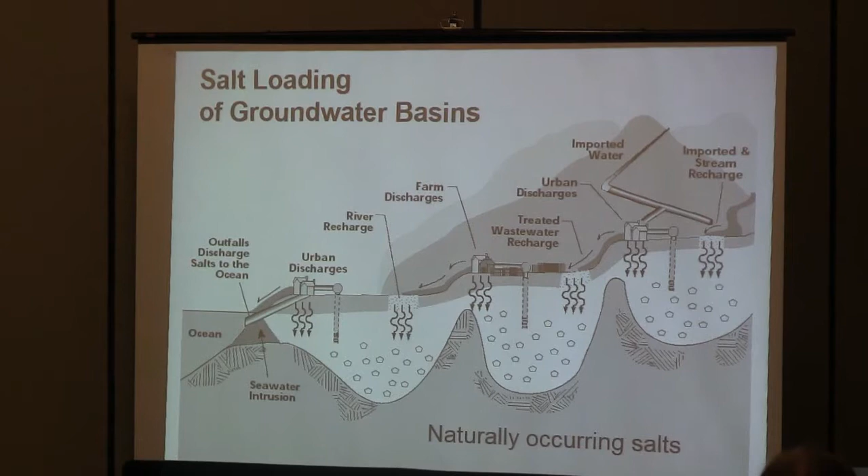We have an extra special case here because we have a lot of marine sediments in our county, so there's some naturally occurring salt at a little higher level than some other areas. So although our state water project water that we get in is relatively low in salt, as it gets reused and as we keep irrigating over time, the salts are building up in our area.

So just a lesson from history. Babylon didn't fall as a result of low water use or all kinds of other things that make civilizations fall. It fell because of salt.

The Fertile Crescent, which includes Iraq, and you've seen that on television, it's not exactly an agricultural heaven. That whole area, Egypt over Mesopotamia, used to be a great agricultural region, and civilization thrived, and everything was great, and we irrigated, and eventually everything salted up.

And it's salted to this day. That's a lesson that we want to learn from, and not have somebody talking about the fall of Ventura County someday because of salts. And they won't, because we've got solutions to the process.

So the problems in our area in general with salts, as I think most of you know, those are the basins. The red ones are the ones with the most salt, orange a little bit less, yellow a little bit less, but they're all higher than would be best for agriculture, at least many of the agricultural purposes. So right now, some groundwater and recycled water in our area isn't suitable for irrigation.

The salinity is too high. There may be a few crops that can be grown, but berries and avocados and citrus have different salinity tolerances.

Dischargers, the wastewater plants in our area, especially when they're using groundwater as some of the source that goes into people's homes and then ends up in the wastewater, they're violating regulatory limits as they discharge into creeks. That's a problem. And then some local groundwater supplies aren't being used due to salts.

There's quite a bit of groundwater in Simi Valley, Thousand Oaks. There's some in Camarillo, Moorpark. They're all too salty to be used, and in Thousand Oaks and Simi, they're actually nuisance water and have to be pumped out because they would flood homes and vaults and things like that.

So we definitely have salinity problems in our area today. Another thing is, everybody's looking at stormwater recharge as a new water source. Well, if your groundwater basins are full, stormwater can't go into the basins. They're already full with salty water.

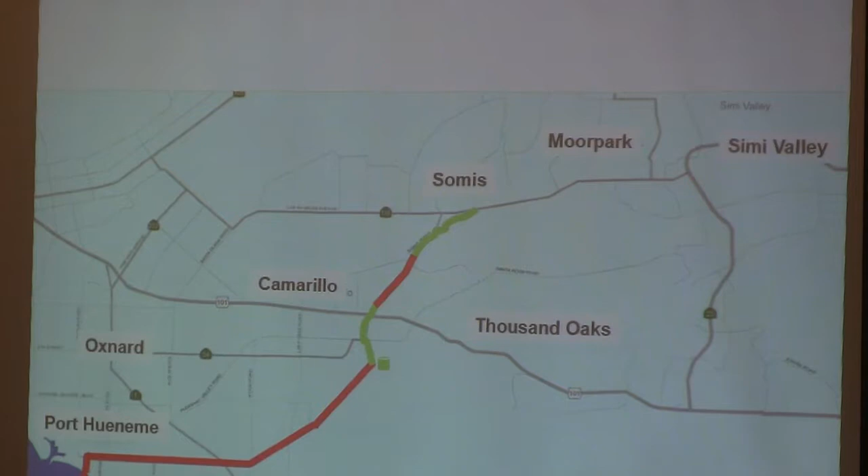And then there's some future reaches. One news update is that last fall, our board made the decision - we had originally planned to go straight from Moorpark to Simi Valley with the pipe, but there are some salinity issues in the Santa Rosa Basin and also in the Conejo Valley area.

And if the pipe comes up Santa Rosa Valley to get to Simi Valley, that opens up a lot of options for the folks in the Santa Rosa Valley and for the folks in Conejo Valley. So that decision has been made, and that's the proposed alignment. Generally, we haven't defined it.

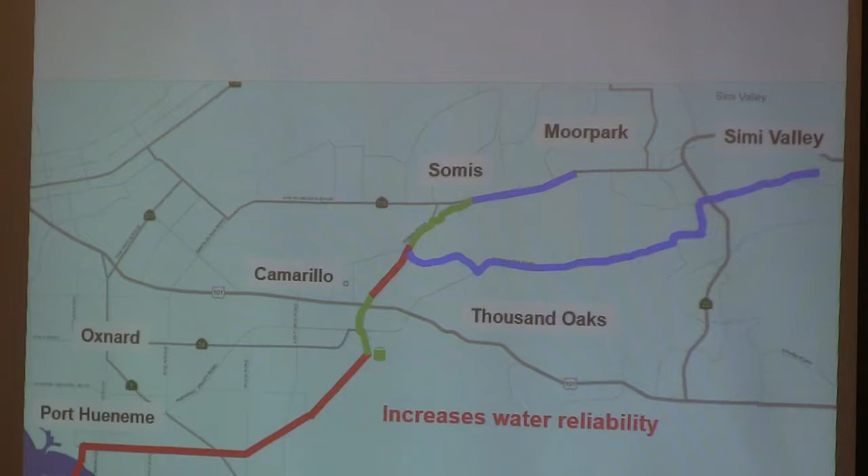So what the pipe does is it increases water reliability, because we're developing local resources. As you all know, the State Water Project has its problems with reliability. And it increases reliability by letting the brackish groundwater be used rather than just sitting there unused or as a nuisance.

So what's being discharged to the salinity management pipeline? It's brine from treatment of groundwater, these brackish desalters, and it's also tertiary treated wastewater. Nobody's actually discharged the tertiary treated wastewater yet, but we have a connection to Camrosa's plant. And the reason is they are doing everything they can to use recycled water whenever they can.

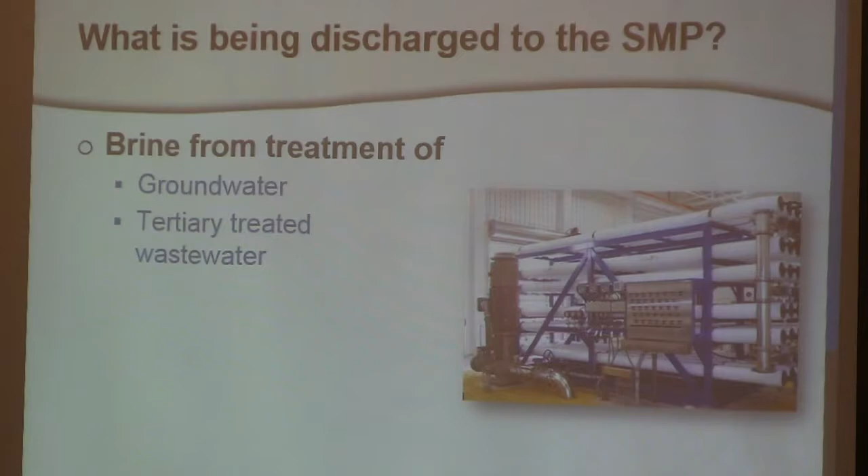So in the spring, summer, fall, there are lots of people who need the recycled water, but when it's raining, they don't have people who need the water.

And if it's a particularly wet year, which hasn't happened lately, they might have too much excess water, and that wastewater is too salty to discharge to the creeks. So they need a place to put it, and they would put that into the salinity management pipeline.

Sorry, the first one was about brine from tertiary treated wastewater. That too we don't have yet, but there are some opportunities, especially as people start looking at potable reuse, direct or indirect, where they're treating their wastewater plant water with reverse osmosis, and that gives them a place to put the brine.

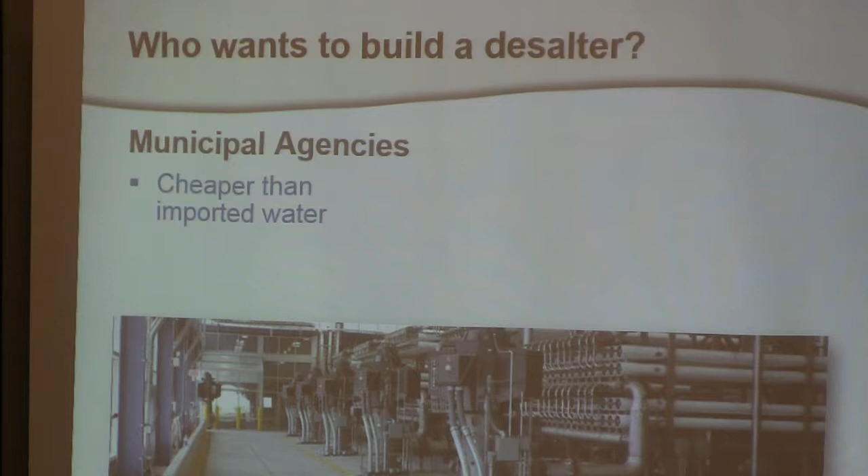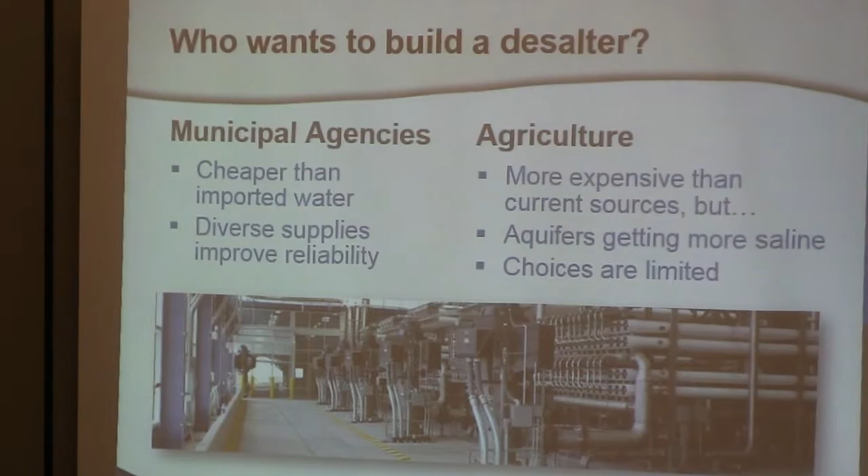Agriculture is also looking at building desalters. It's more expensive than their current sources, their groundwater. But as the aquifers get more saline, they end up with limited choices. And if their other choice is buying imported water, these desalters look pretty good. It's also less expensive for agriculture to treat, because they don't have to get to the same quality standards that the municipal folks need to.

And we'll get to some costs—Brian will get into some costs later. So I'm going to go through the facilities, and we have some flyover footage, so you can pretend you're at California Adventure, flying over.

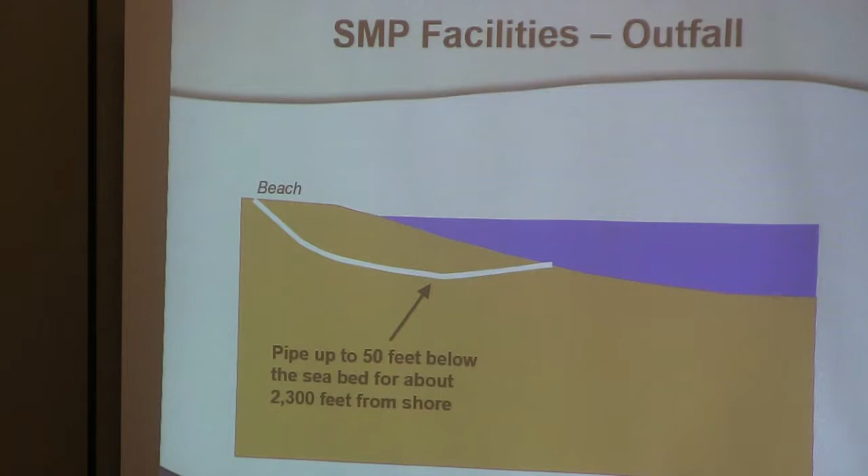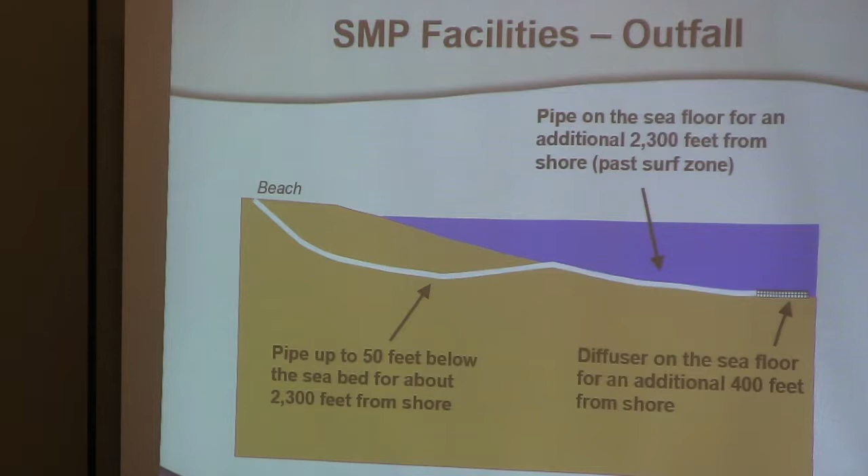So we have an outfall out in the Hueneme area, and just to give you a sense, we'll fly over it, but it goes underneath the ground to get past the surf zone, about 2,300 feet. Then it lies on the ocean floor, and there's a 400-foot diffuser that extends further, and that's where the water comes out—that's the pipe. We actually made the pipe at Point Mugu, the Naval Base, and floated it over and pulled it into shore from the ocean.

And on the right, you can see the diffusers. They're little 5-inch diameter pipes that come off of this diffuser every 15 feet. Those are little rubber check valves where the water can go out but can't come in. And then we've been building pipe—that's 48-inch pipe on Hueneme Road, and this pipe down to the right is 30-inch diameter pipe that was along Lewis Road in Camarillo.

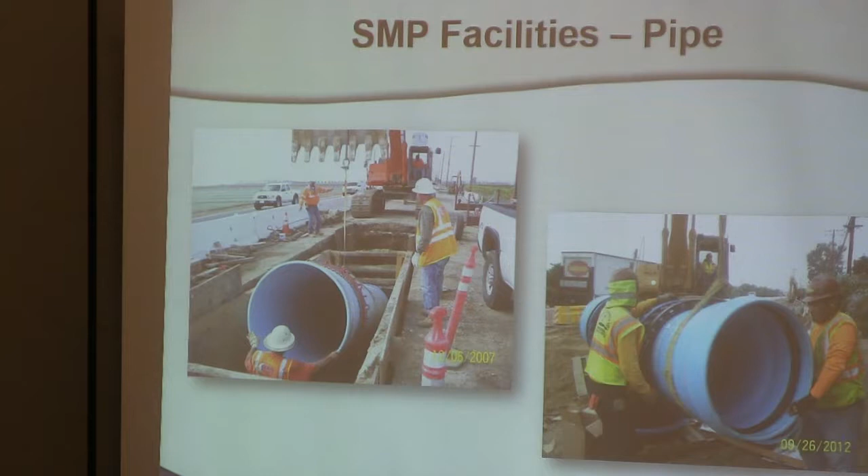So now we're going to do a bird's eye view after the flyover. We're going to look at the Port Hueneme brackish water plant, the Camrosa Round Mountain treatment plant and reclamation facility, Camarillo's plant, North Pleasant Valley desalter. There is a plan for Bell Ranch desalter—those two have some challenges to work out. I don't have a site for that, but it is a possible project along the way. And then we will end at the Las Posas Agricultural Desalter.

So there we have the cities. And the pipe—the blue is what's already in place and the green is in process. And off the far right it's ending right in the Las Posas Valley.

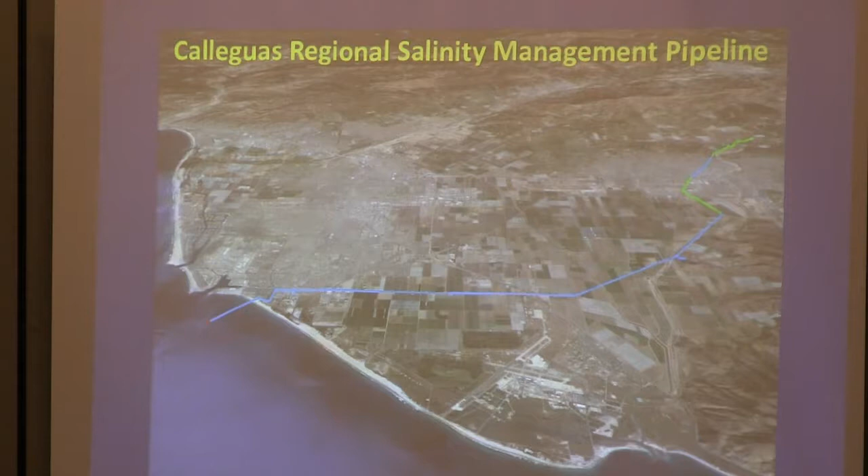So we'll fly down to the Hueneme outfall. This is a little less than a mile offshore. Off to the right is the fishing pier. About 400 feet long—that's the diffuser I described earlier, and that's what the little ports are on the diffuser.

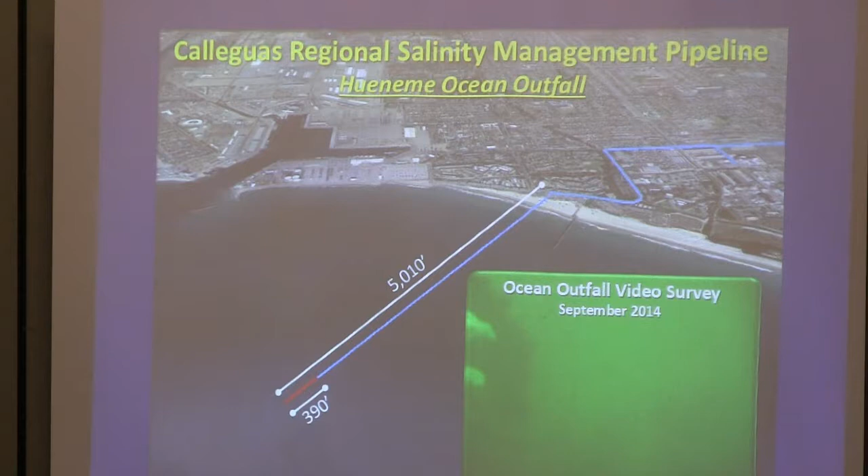This is a video from last fall that we're required by the regional board to capture, to see the condition of the outfall every year. A lot has grown on there—there's kelp growing on it. It's hard to see, but you'll see it. He's holding one of the little ports—the water's coming out. That kelp isn't causing a problem; it's there, it's a habitat for kelp, and it's working.

So now we're going to fly in. We're coming in—this is Surfside Drive in the city of Port Hueneme. We're going to head over to the brackish water plant. There's going to be a line around where Port Hueneme's brackish water plant is.

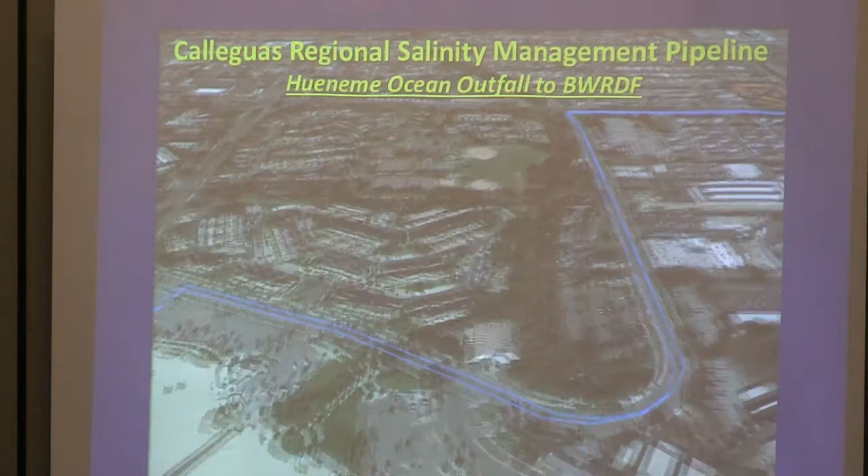Off to the right, you'll see Oxnard's advanced water purification facility. They are not discharging to Calleguas' outfall—they're discharging to their own outfall. So there with the orange is Port Hueneme's brackish water facility, at Hueneme Road and Perkins.

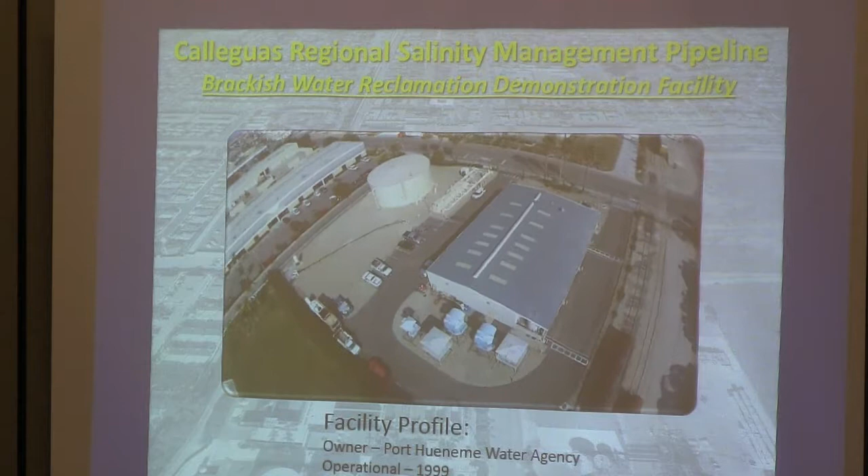So that facility's been in place since 1999. They have been discharging to Oxnard's wastewater plant, but they're making that more salty. So Oxnard would like to have them off of there, and they are now discharging to Calleguas' Salinity Management Pipeline. So they were really the first in the county that got into this desalter business.

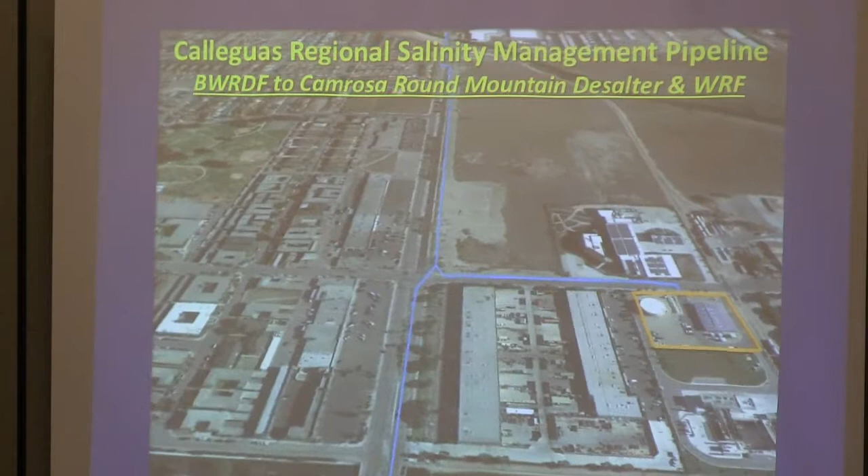So we're going to head up Hueneme Road. Off to the right, that big empty area is where Oxnard is planning the Ormond Beach wetlands. We're going to head out of the city of Oxnard, across the J Street drain.

And we're just heading through some agricultural areas. United is looking at putting in some brackish wells out here. They would be off to the right of this facility, and they would potentially discharge to the Salinity Management Pipeline.

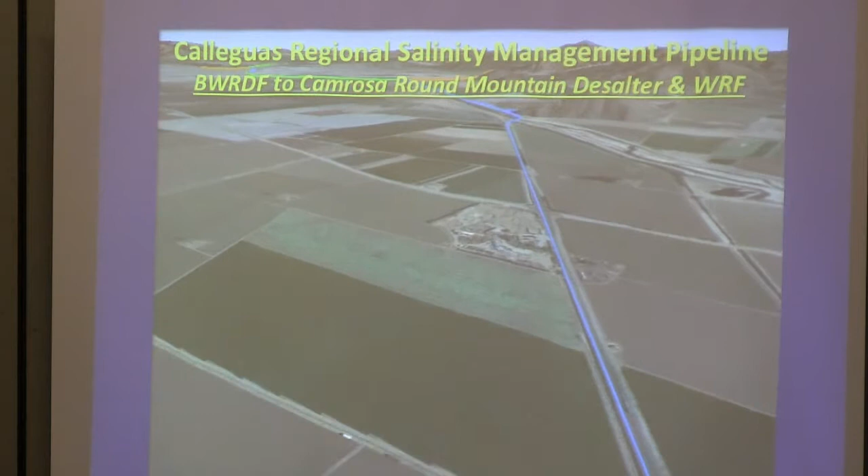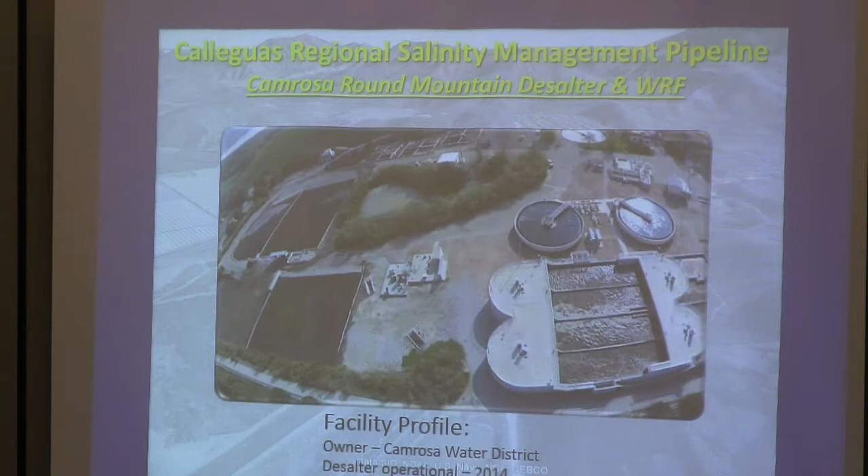The county let us put our pipe in the bridge that goes over to Potrero Road. Now we're coming over to Camrosa's facility. Just ahead, off to the left by Old Lewis Road, is where they have a well that feeds their brackish water facility, and they put the brackish water treatment plant at their wastewater facility. This is just one well - the yield is 1,000 acre-feet per year. They've been operational since early last year and discharging to the Salinity Management Pipeline.

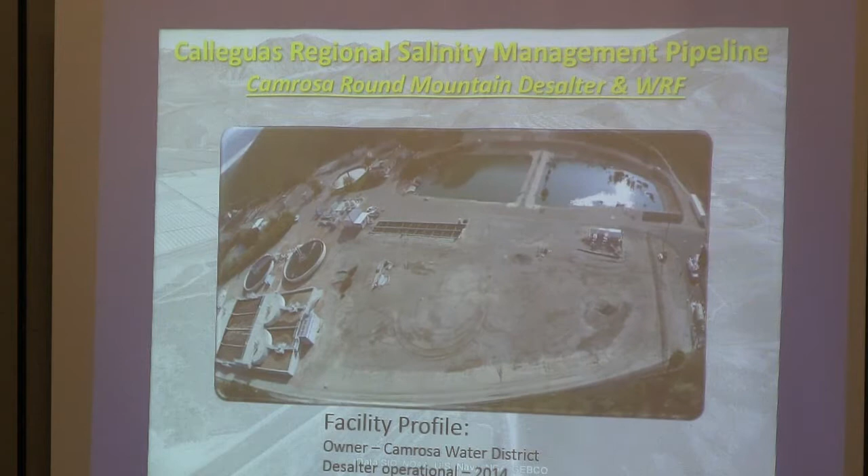What you're looking at here is the wastewater plant. There's the desalter, right, Terry? That is the desalter, correct? I'm sure Terry remembers every minute of this construction.

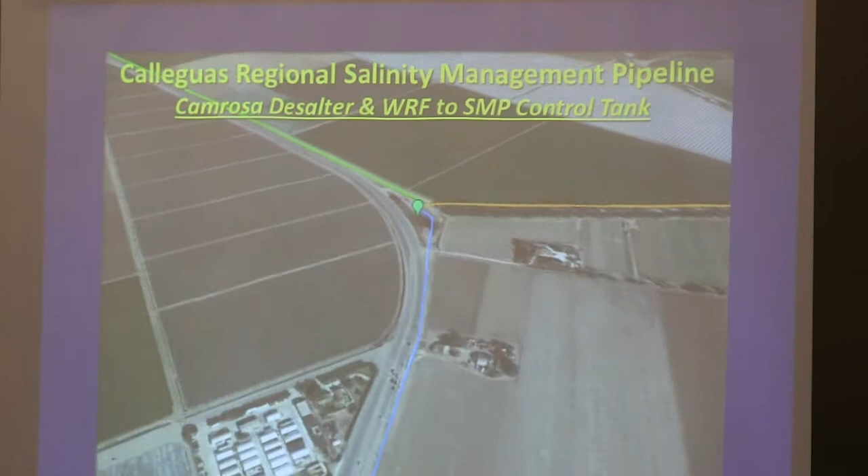So we're going to head on up to Calleguas' control tank, which if you've been driving down towards Cal State Channel Islands, you might have seen a tank going in. Not a huge tank, but it's necessary to provide a little bit of water pressure across the Oxnard Plain to get water pushed out the outfall. It's right by Collie and Lewis Road, and this is where Camarillo's going to tie in. We'll fly over to Camarillo's wastewater plant in a second.

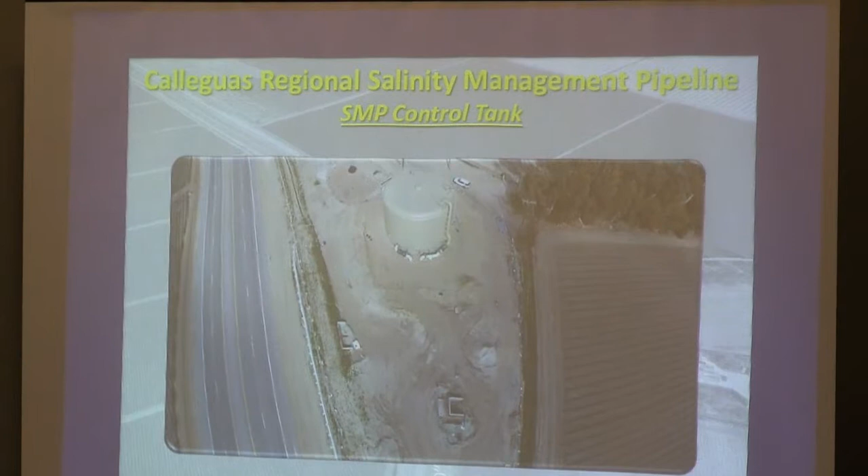There's the drone - you can see the shadow from the drone. So this is the plant. It's still under construction, we haven't got the site all cleaned up, but you can see the tank right there by Lewis Road. We tried to make it a color that would blend in pretty well.

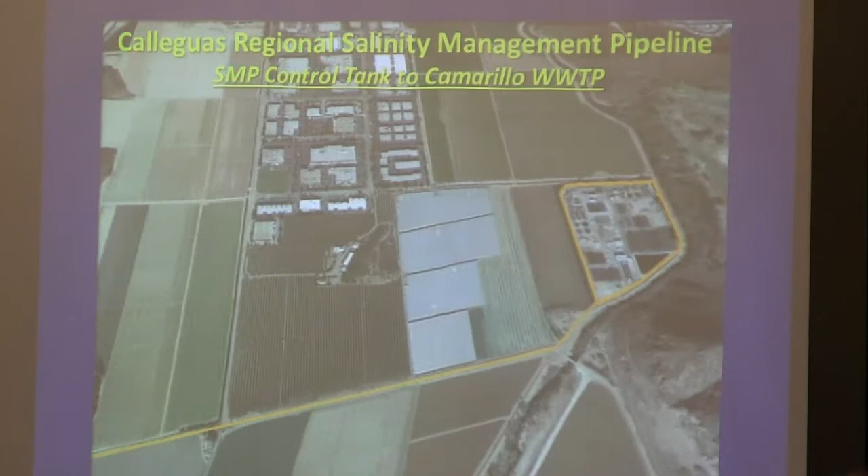Let's head over to the Camarillo wastewater treatment plant. This is a pipe that's partly built by Camarillo, and it will be a recycled water pipe that can serve the farms along here. But if they have extra water, same thing I described before, during the wintertime when they can't discharge to the creek, they'll go ahead and discharge that to the Salinity Management Pipeline.

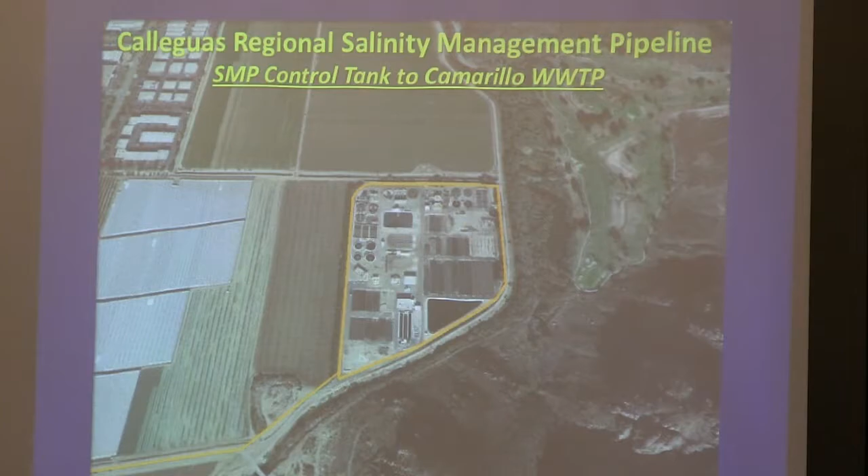And here's their plant, a flyover of their plant. I don't know if they knew that they were being spied on earlier this week. Pretty big plant - I had never seen this view of it. So they are making good quality recycled water that they are working to distribute. I think they're close, or maybe they have already distributed to Village at the Park at this point.

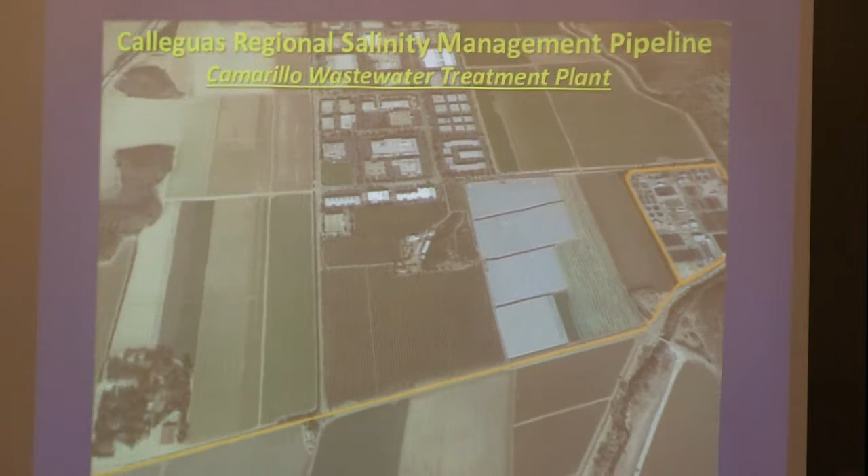So here's their pipe back to the Salinity Management Pipeline. Let's head upstream - this part is under construction now. You'll see this, they're in the very early phases, going in on the ag property. We're going to have a difficult crossing at Lewis and Pleasant Valley - we're going to tunnel underneath there, but there'll still be some traffic impacts.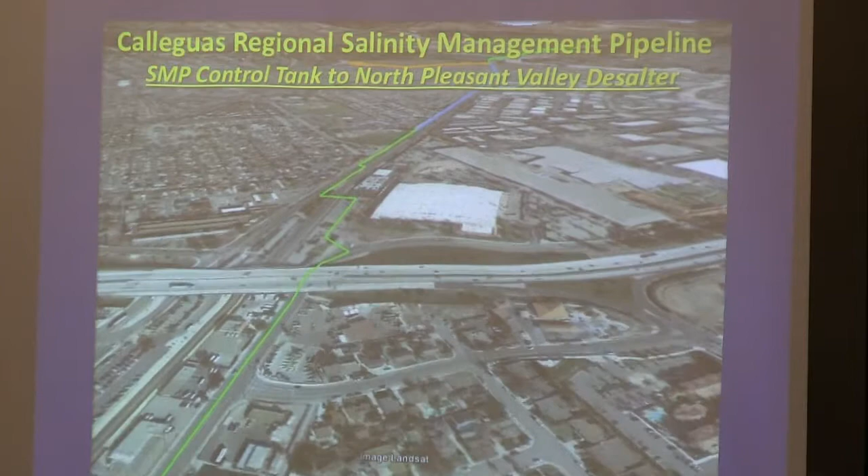Headed up Dawson Drive, going to go underneath the freeway, continue up Dawson Drive - I'm sorry, underneath Lewis Road. And then underneath the freeway here, into the Ventura County Transportation Commission parking lot, past El Tecolote, past Temple, and tie into the pipe. For those Camarillo folks, you know.

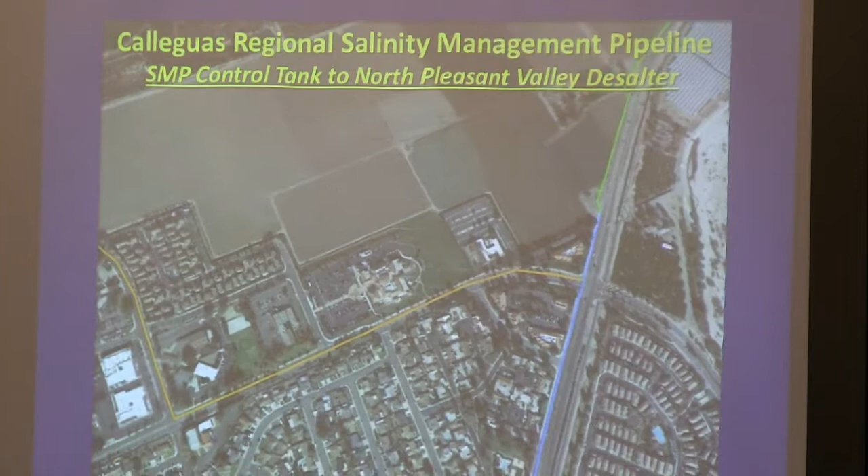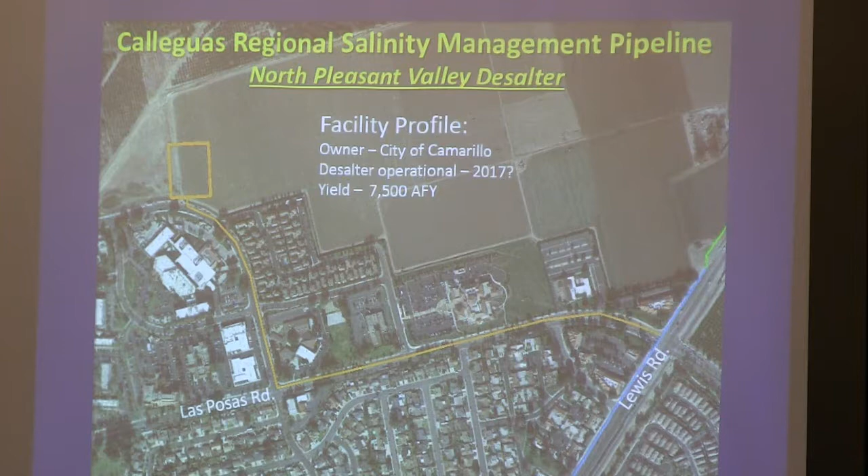They have some wells off to the west here. There's the Camarillo Library. Again, I don't know if this is the exact footprint, but this is the general idea - they would build a desalter somewhere in this area. They're looking at a pretty big one, potentially operational in a couple of years, with a fairly good yield of 7,500 acre-feet a year. Bell Ranch is also looking at something in this area, though I didn't have a location or much detail on it.

So this last reach, we're going to end in the Las Posas Basin. We're going up Somis Road. Off to the right, you can see the arroyo.

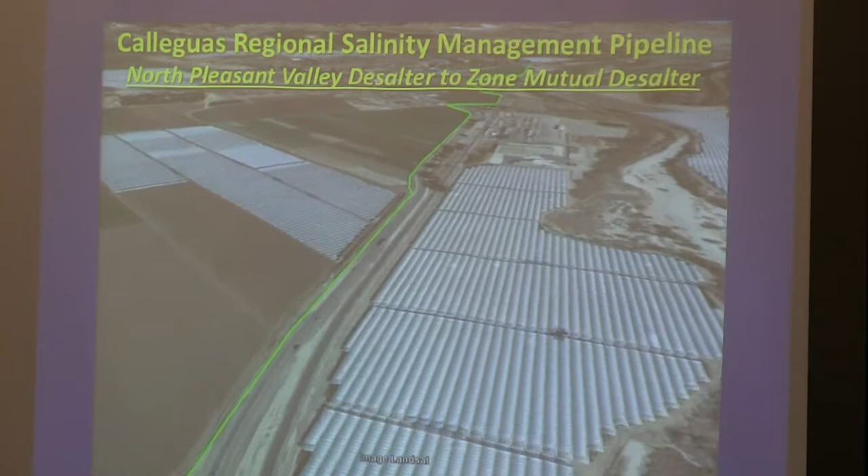Last little bit, headed up along Somis Road, and then we're going to go by the railroad tracks. Somis Road heads off to the left, and we're going to just keep going straight along the railroad tracks. About in this general area, you start getting into the Las Posas Basin. And two years from now, the pipe will be up to that location.

That desalter Carol's going to talk about, yield could be up to 3,000 acre-feet a year. She'll talk to you about that in more detail.

So we talked about all those discharges, other future potential ones. United is looking at a brackish water project. Moorpark is looking at a desalter. Santa Rosa agricultural folks, Camrosa. Thousand Oaks is looking at desalters, and Simi Valley as well. So we've got some interesting stuff coming in the future that will all be moving the salts out of our watershed.

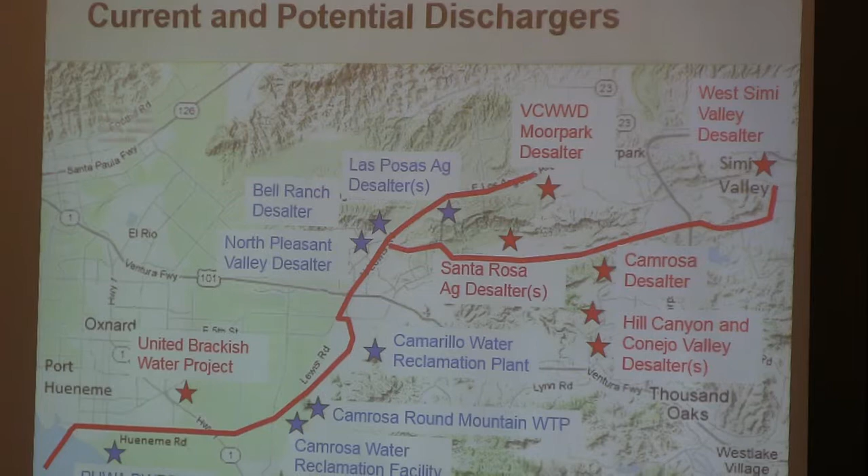And then potentially indirect reuse of wastewater. Turn it over to Brian.

So we're going to switch gears here and start talking a little bit about the study that we did in the Las Posas Basin that we recently completed to investigate brackish water, groundwater desalination opportunities for ag entities. First, I'll give a little background, frame up the water quality issues, and then we'll get into the study.

So here's a map of the Las Posas Basin, and just to keep you oriented, City of Moorpark is here, far right, Camarillo down here. Basically, the basin occupies the Las Posas Valley. Highway 118, LA Avenue running through Valley, Lewis Road coming up to the Somis intersection. There's three subbasins that we frequently refer to in the Las Posas Basin: a west, an east, and a south.

The important major feature in the basin is a geologic discontinuity that bisects the valley. The aquifers in the west do not communicate to much degree with the aquifers in the east and south Las Posas Basin. So these are sort of two independent but linked areas, linked in the sense that we have two major water systems whose pipes and facilities do cross over this boundary, so water does move back and forth between the subbasins on the surface, but not in the subsurface.

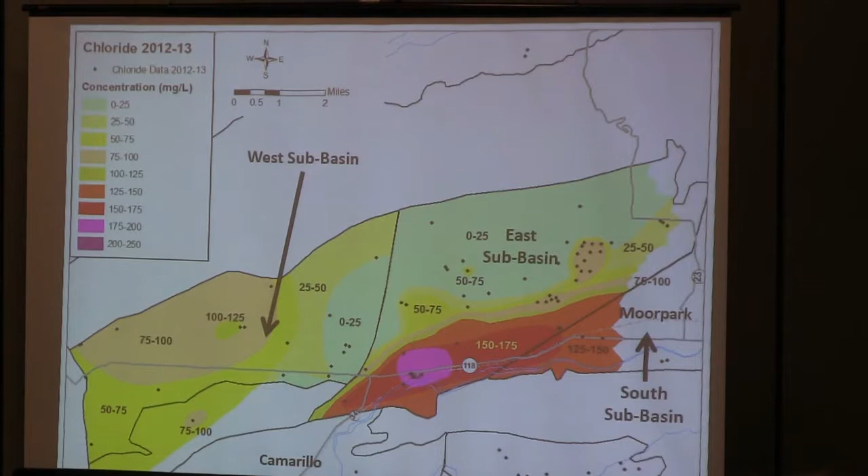One of those is Zone Mutual Water Company system, which you'll hear more about later. It's one of the water systems that spans that boundary. Down here on the south side of the basin, in the faint blue, is the Arroyo Las Posas. This is a creek that flows through the basin. It's an important feature in the basin. It does continue on up into the watershed, into the Simi Valley area, and much of the source of water that we see year-round in the creek does come from Simi Valley.

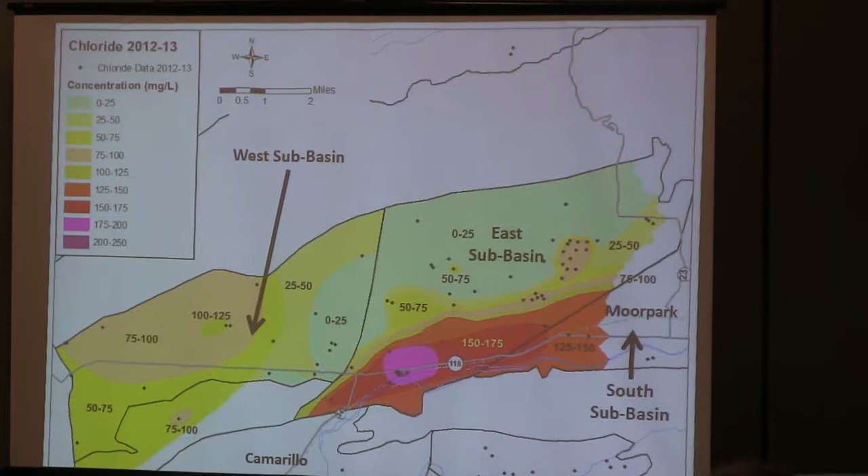What you're looking at in terms of the colors is the chloride concentration in the water, ranging up to 250 milligrams per liter in the darkest purple shade here. And there's been a long history of water quality issues in this part of the Las Posas Basin, particularly along the Arroyo Las Posas. As early as the early 1930s, there's documentation and reports by the state of poor quality water along the Arroyo and in the shallow aquifers.

This early water quality issue was related to the natural salinity in the marine soils that Susan mentioned earlier, as well as potentially some of the earlier agricultural activities in both the Las Posas Basin and the Simi Valley area. Beginning in the 1960s, this brackish water began showing up in the deeper, main aquifer in the basin that most people draw from. And over the last 50 years, we've seen this plume, or area of brackish water, extend almost two miles north into the basin.

The major reason for this has to do with two main factors. One, beginning in the late 1960s, the effect of importing water into Ventura County was starting to be seen, particularly in Simi Valley. The result of this was two things: first, discharges from the Simi Valley Water Quality Control Plant to the Arroyo began to fill up the shallow aquifers in this area. Later in the 1980s, the city also had to start pumping shallow groundwater in the west end of Simi Valley to prevent nuisance effects related to the rising water.

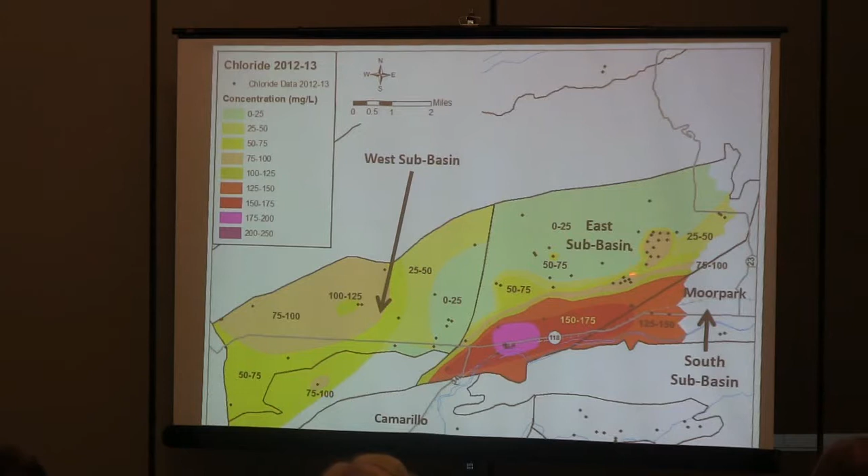That water was also discharged and continues to be discharged to the Arroyo, and that water also helped fill this area up. So with the addition of that water, the shallow system built up water level and pressure, which then caused the water to start moving down into the deeper aquifers, which I'll show in a cross-section view in a minute that will make more sense. At the same time, pumping in the first half of the last century had lowered the water levels in the deep, main aquifers. So you have these two conditions happening simultaneously: less pressure in the main aquifer, more pressure in the shallow. That created the conditions for this water to move down into the main part of the basin, and that's the condition we have today.

So if we were to take a cross-section view through this part of the basin here, looking south to north, this is generally, in a cartoon sense, what you would see. The main aquifer is the Fox Canyon aquifer, where 90% of the pumping in the basin comes from. Here's the Arroyo Las Posas on the south side of the basin, and the shallow aquifer associated with the floodplain deposits from the creek. This well here generally represents the majority of the pumping in the basin.

And of course, the quality of that water is the subject of our study, shown here in red. What's developed is this area of brackish water. So, looking ahead, what do we expect to see? Given the prevailing groundwater movement and flow paths, this water will continue to move into the basin and be intercepted by pumping wells.

The second thing we know is coming is that Simi Valley is going to develop its recycled water resources and eventually its groundwater resources, which will result in less discharge to the creek from water infiltration. The net effect of those two things is less water in the creek. That creates an opportunity: we can capture more stormwater that has better quality. So in the long term, through the Salts TMDL and the decrease in water coming from Simi Valley into this area, there's an opportunity to put better quality stormwater into the basin.

How much we'll be able to recharge into the basin is the $64,000 question. And whether there will be enough water, that's a subject for an entirely different Water Wise presentation.

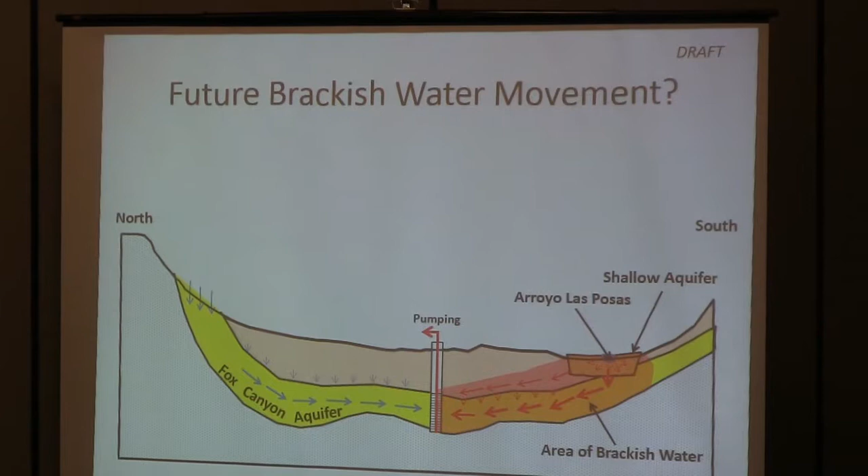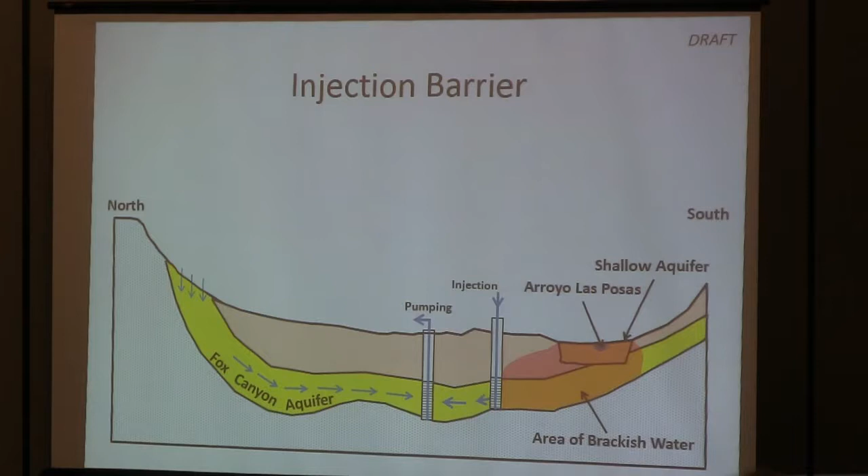So really the question for us is, what do we do with this water? What are we going to do with this situation? Of course, there are several options. One option would be to install a line of wells at the front of where this area of brackish water is, and try to capture it, treat it, and deliver it to users in the basin, perhaps offsetting other pumping. Another option would be to inject water at the leading edge of this area of brackish water and try to hold it back.

A combination of the two: you can pump within the plume of brackish water, treat it with a desalter, and then inject that water back in. That way you're holding the plume back while you're cleaning it up. These three different options all have in common that they're very large, very expensive projects.

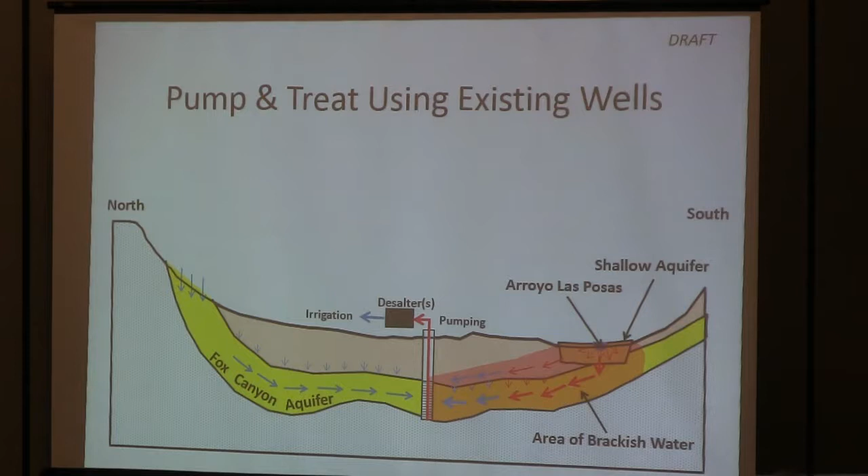Another option is to recognize that this water is going to move and impact additional agricultural wells over time, and look at ways to pump and treat with the existing wells in the basin, again recognizing that over the long term, the quality of the water entering the system will improve. This is really the concept that the agricultural entities in the Las Posas Basin wanted to investigate further - really what was behind our study.

So just to recap why we're looking at pump and treat with existing wells: we have the salts TMDL. The question is why build a big expensive injection or pump and treat project when you know that the quality of the water entering the system is going to improve over the long term. Looking at pumping and treating with existing wells provides a lot of flexibility in terms of allowing decisions to desalt the water to be made at the level of the water system, or perhaps even at the level of a ranch irrigation manager. And if you're employing that flexibility, making those decisions at the water system or ranch level, you're creating a situation where only the folks who want better quality water are bearing those costs. So those were the attractive elements of this approach while we studied.

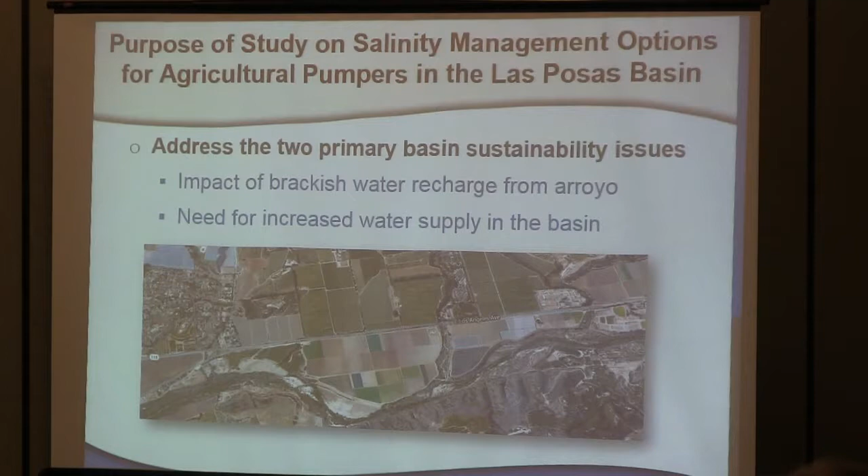The purpose of the study was basically to address the two primary issues in the basin with respect to groundwater sustainability. We talked about the impact of the brackish water from the Arroyo. We also wanted to look at potentially some ways to increase supply in the basin, although this was more of a secondary consideration for this particular study.

So, study goals and objectives. We were trying to look at the existing infrastructure in the basin, primarily the wells and existing pipeline facilities, in combination with desalters and new facilities, pump stations, and additional pipelines, to develop a system that could distribute the better quality water throughout the basin. So the primary objectives were to treat existing impacted wells, construct desalters, and we also looked at some additional shallow wells. This is where the new supply component comes in.

When you desalt, you have a loss of water - the salts get concentrated into the brine stream. So we looked at shallow wells along the arroyo to make up that loss of water. The idea behind the shallow wells is that pumping close to the creek would potentially induce additional surface water percolation, providing water supply enhancement to the basin.

We looked at costs to achieve 60 and 120 milligrams per liter chloride in the finished product water. We looked at just those two numbers as a range that ag might consider for a desalter - 60 being sort of the highest quality water people might be willing to pay for, versus 120 being the lowest quality water they might tolerate at a lower cost.

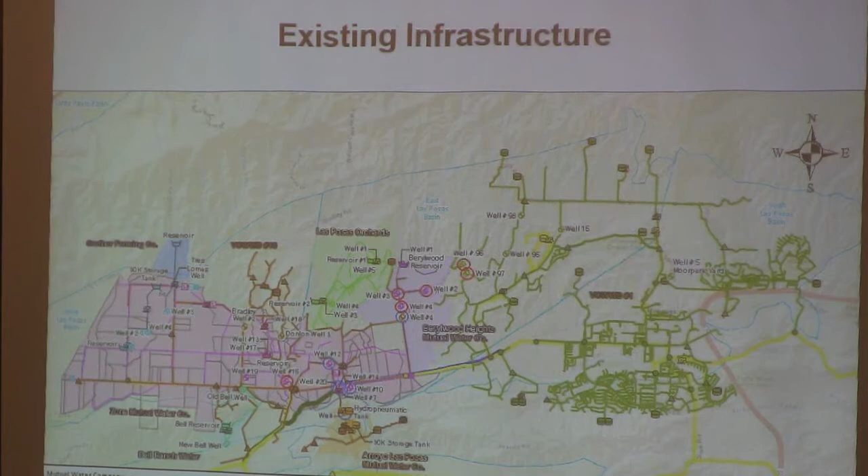To develop the demands for water that needs to be treated, we looked at mapping under current conditions - at the time we started the study in 2012 - and developed an estimate based on 20 wells in the area impacted by water quality, with chloride above 60 and 120 milligrams per liter, again the two end numbers we're looking at in our study. We found 20 wells with an associated demand of 8,600 acre feet per year, and to put that in perspective, for the eastern half of the valley that's about half of the pumping in that part of the place.

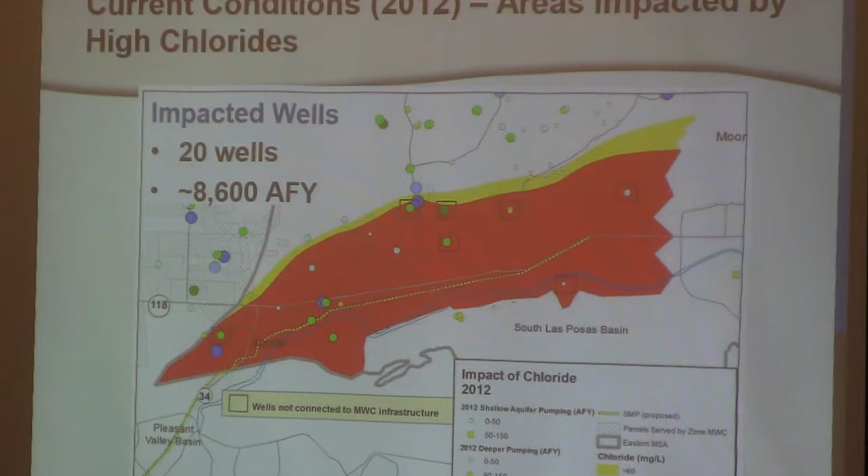We also looked 30 years out to 2042 to see, based on what we know about the rate of movement of groundwater, where the 60 and 120 milligram per liter chloride areas might be in 30 years, and develop a similar estimate.

Approximately 70-80% of the current pump in the basin. So over time, this plume will migrate and impact a significant majority of the groundwater use in the basin.

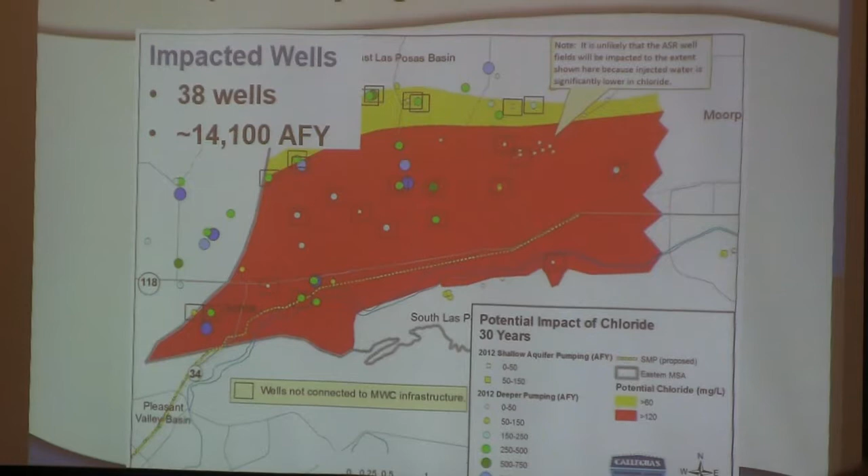The stakeholders decided to do all the alternative development and analysis based on the 2012 conditions. They felt that 30 years was too far out, a bit too speculative, so we developed all alternatives based on current conditions.

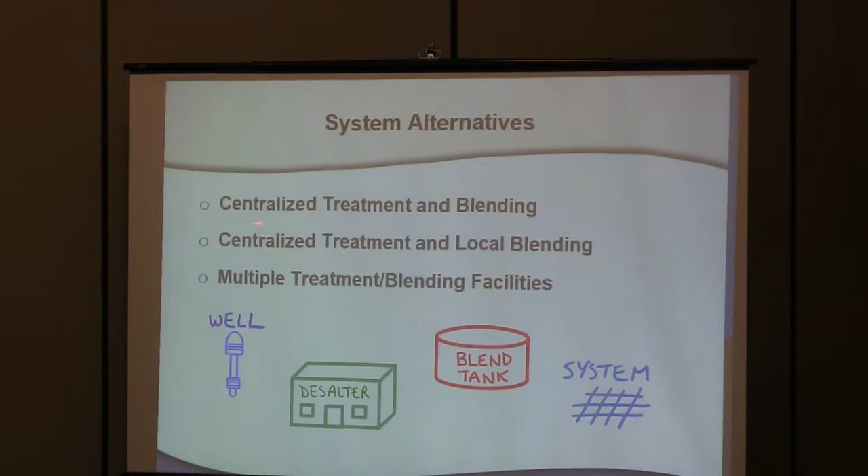So what are the alternatives? We looked at 3 alternatives. Alternative 1: centralized treatment and blending. We also looked at centralized treatment but with blending at each water system. And then we looked at individual treatment for each water system. We looked at 3 water systems: Zone Mutual, Berylwood, and Arroyo Las Posas. Those are the systems that are either currently impacted or predicted to be impacted in the relatively short term.

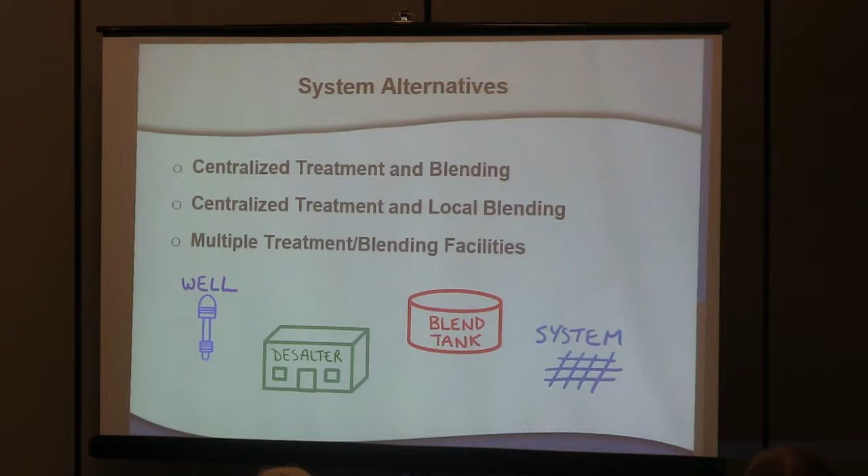Alternative 1, centralized treatment and blending. We have 3 water systems here, the distribution systems, served currently by wells, primarily. We have the desalter, the centralized treatment facility. Water would be pumped from the wells at each water system, piped to the regional desalter. Through the treatment process, we concentrate the salts into a waste stream. Typically 15 to 20% of your feed water ends up being your waste stream, now discharged to the SMP that Susan talked about.

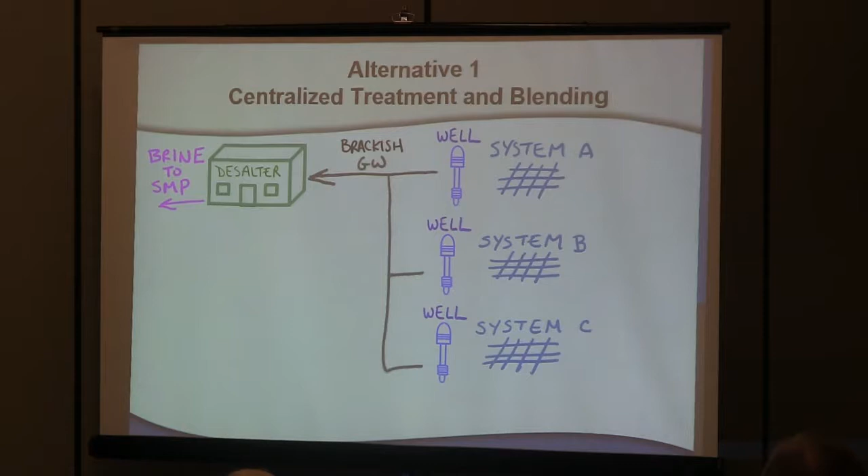Out of the desalter, we would have 2 sources of water coming into a blending tank. One would be the very high quality treated water - water coming out of the desalter with just a few tens of milligrams per liter total salts. In order to blend up to the 60 or 120 milligram per liter finished water quality, we would blend in some raw groundwater from the raw water pipeline. Then this would get delivered back to each of the 3 water systems for their use.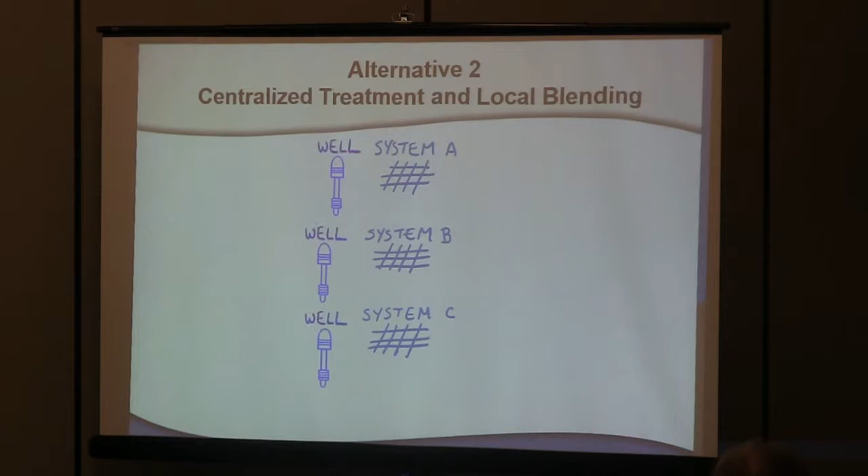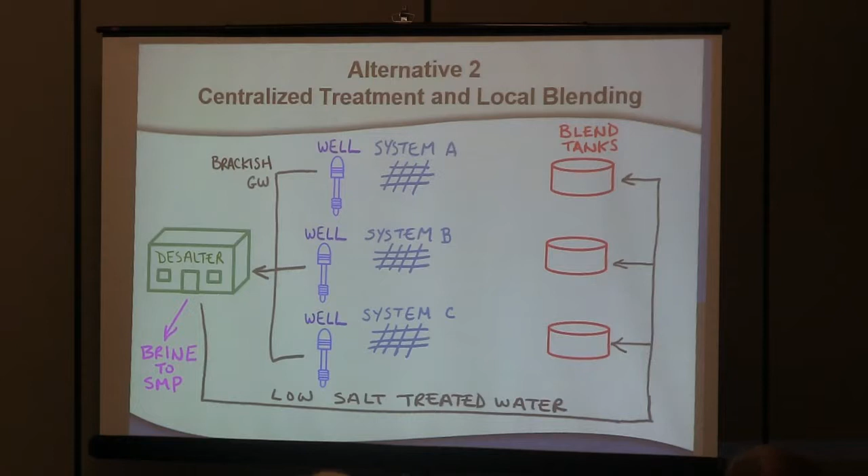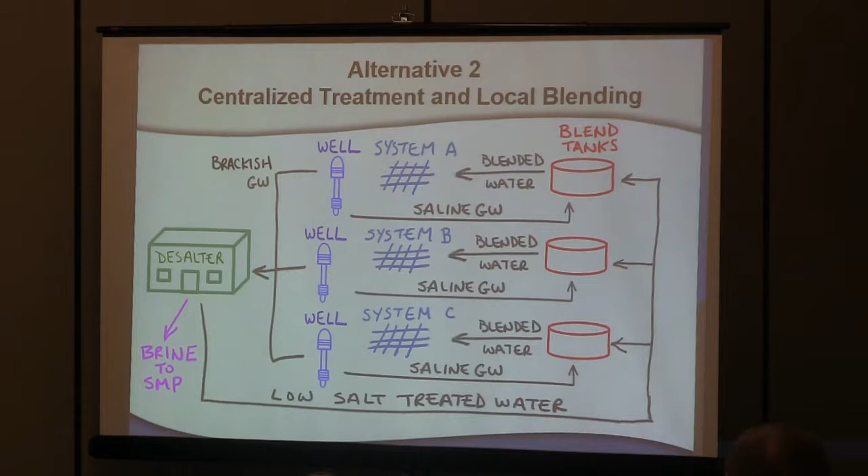Alternative 2 is similar, except that the blending would happen at the individual water systems. Again, here's our water systems, the wells with brackish water serving those systems, desalter, source water gets pumped to the treatment facility. We have our brine going to the SMP. This time the blending happens back at the water systems. Finished water with low salts gets pumped over to the water systems where it's blended there with groundwater from the wells. In this scenario, all the water systems have reservoirs or tanks existing that can be used for this capacity, so these tanks would not be new infrastructure. And of course, the blended water gets delivered into the systems.

The last alternative is basically a complete functioning treatment unit for each water system - a small plant operating in each water system.

The next step was to evaluate the alternatives, and the details are in our report, available on our website for anybody who's interested. I'm just going to go over the very high level results. Of course, the primary category of evaluation is cost. The main cost components include the RO facility - we looked at membrane treatment.

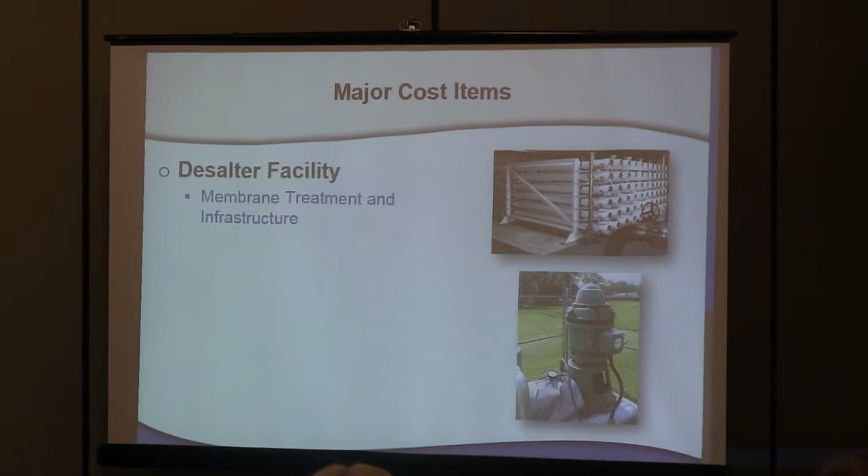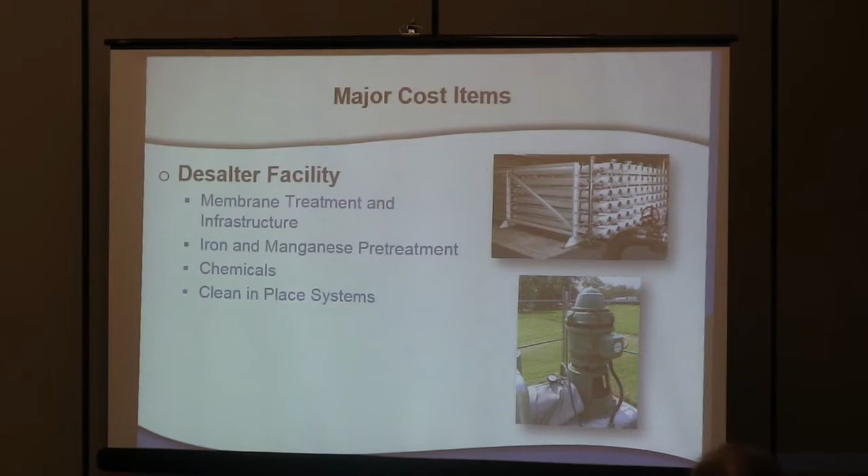For this area, we have iron and manganese in the groundwater, so there would be pre-treatment to protect your membranes. We looked at the typical chemicals, descalers, etc., and clean-in-place systems. These are all the major cost components of the facility. We estimated the costs for these based on other studies that have been done, for example, the Moorpark desalter and the Camrosa desalter. So we have pretty recent numbers available to scale to our use.

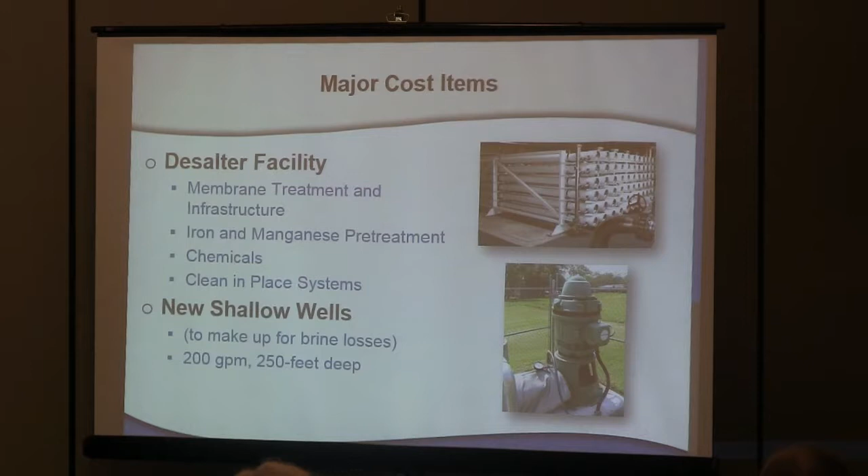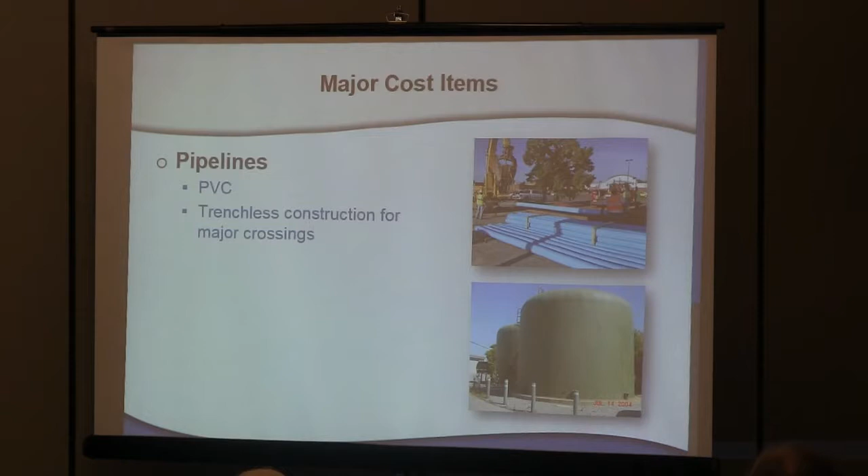We also looked at new shallow wells. Again, the idea here is make-up water for the water that's lost to the brine, to the SMP. We made some assumptions about that - pretty shallow wells, 250 feet deep. We had fixed costs for those. Other cost items obviously include all the pipelines required to move this water around and connect the systems. We assumed PVC, trenchless construction for major crossings.

Storage tanks and booster pumps are another major cost component. Of course, the connection to the...

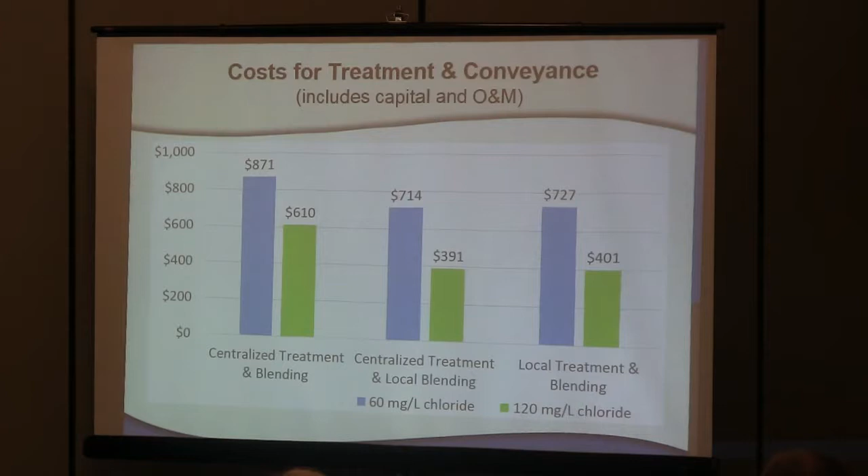So in terms of the preferred alternative, the local treatment and blending, so one treatment system for each water system, was decided to be the preferred alternative. Primarily because of cost, it was one of the two lower cost options, but also because of the flexibility and the ability to phase in over time based on individual needs of different water systems.

So for example, Zone has immediate need for better quality water, they can build their desalter first. Others might be able to wait longer. So building separate facilities allows you to do that.

The other thing it allows you to do, which is on the slide here, is it allows those different water systems and users to tailor their water quality to their needs. So different crops, different blending, different strategies, all sorts of different opportunities to maximize the flexibility by having different desalters.

Cost I already mentioned. And it also happens to be the lowest initial cost in terms of just doing the first facility, which potentially could be Zone.

So in conclusion, pretty straightforward: it's feasible to use desalters. We knew that going in. The technology is proven, available. We knew we could treat the chloride impacted wells, provide blended water to folks who need it for salt sensitive crops. That was all known going in.

We also knew that cost would depend on the water quality goal, that was not a secret. What was a surprise, though, was the fact that multiple desalters turned out to be the most cost-effective and preferred option. Going into this, many of us thought one large centralized facility would end up having the lowest cost, but it didn't.

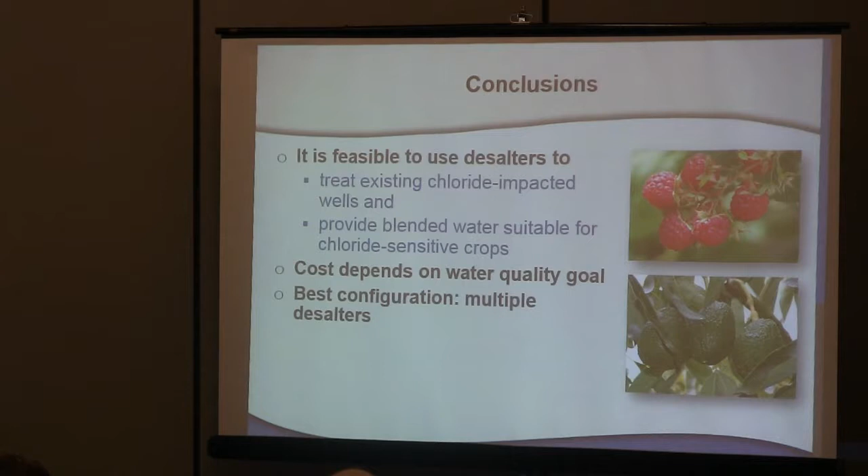And really that has to do with the fact that there's a lot of pipeline needed to move the source water to a centralized facility and then pump it back to the different water systems. And so when you did all the costs and came all out, it shook out that separate treatment facilities actually was cheaper. So it's probably the biggest takeaway from this study.

All right, so what's next? Looking ahead...

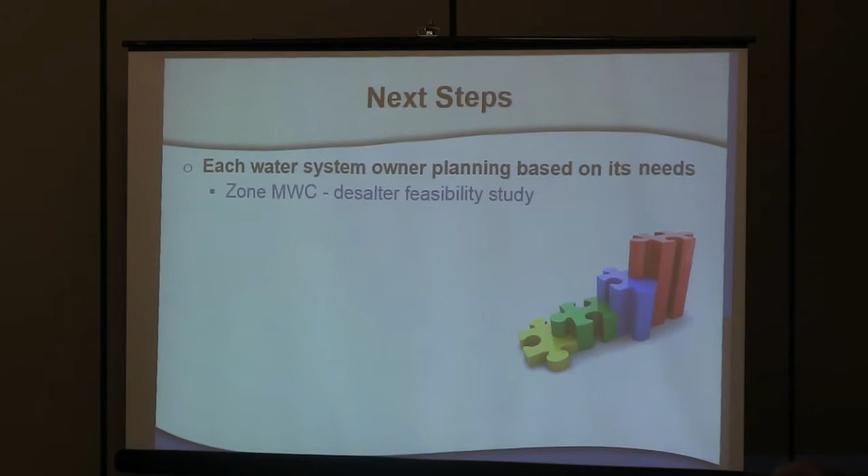Each water system owner is going to do its own planning based on its needs. Zone's looking at potential desalters, Carol will talk about that a little bit more. Bell Ranch is also conducting a hydrogeologic study and doing their planning for a potential desalter that would be down near sort of the boundary between the East Las Posas Basin and the Pleasant Valley Basin.

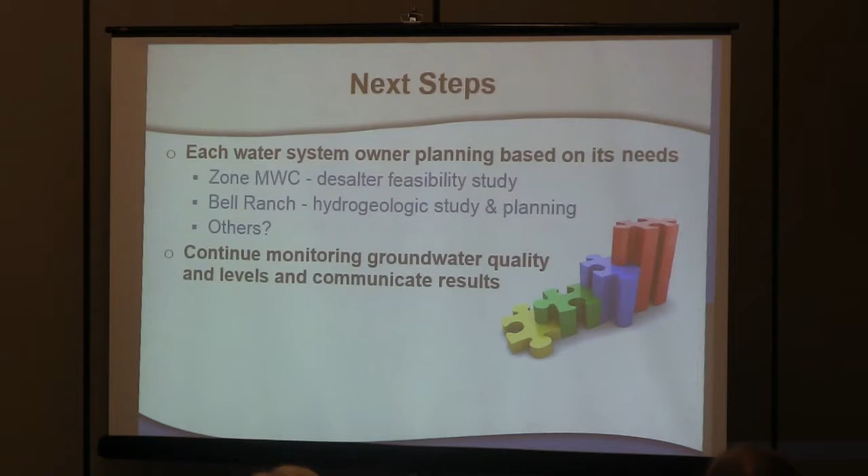Potentially others as well. So we'll continue monitoring our groundwater quality and levels and communicate those results so that these water system owners can do their planning, so they can understand the rates of movement and change in the quality of groundwater in the basin. We get data from well owners, USGS has a monitoring program, as does the county. And we'll continue our planning efforts with the Las Posas Users Group and the GMA in a collaborative fashion to address these issues. With that, we adjourn.

I'll start off with a...

Incorporated in that area to serve domestic water to the land that developed along the arroyo. The major shareholder in the development was the Berylwood Investment Company, owned by the Bard family. They owned vast tracts of land, about 7,500 acres in the Las Posas Valley. And in 1919, this group hired an engineer to come in and study the feasibility of developing an irrigation system in the Las Posas Valley.

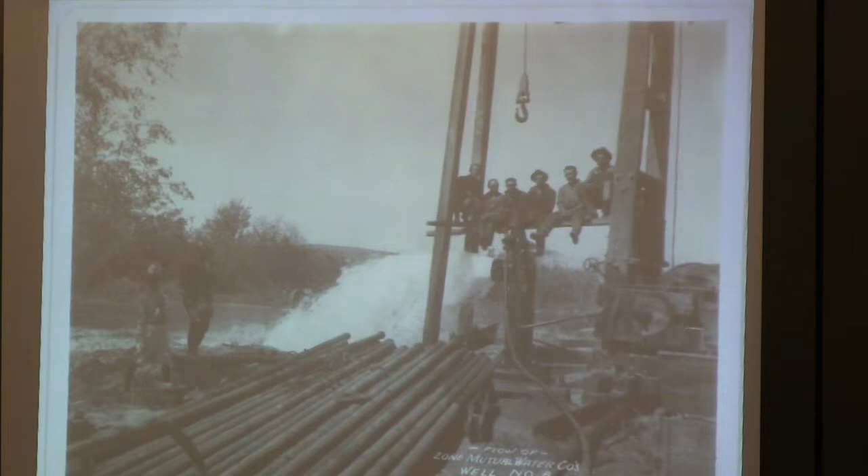By 1924, the zone systems were completed with wells along the arroyo. That consisted of a main pumping plant located at Los Angeles Avenue, pretty close to Sand Canyon Road. It was a 36-inch main line that carried water from this main pumping plant miles away to a reservoir north of LA Avenue between Donlon and Bradley.

The water from that reservoir is then distributed west as far as the dividing line between the old Rancho Las Posas and Rancho Del Norte, which is kind of out toward Center School Road, up on the diagonal.

So the two zone companies merged in 1948 to become Zone Mutual Water Company. The Las Posas Water Company, that domestic company, is now Ventura County Waterworks District 19. And Berylwood Heights Mutual Water Company, the neighbor just east of Zone, was formed in the 1930s by some of the same shareholders. That's how Zone started, and that's why the facilities along the arroyo feed much of the Las Posas Valley.

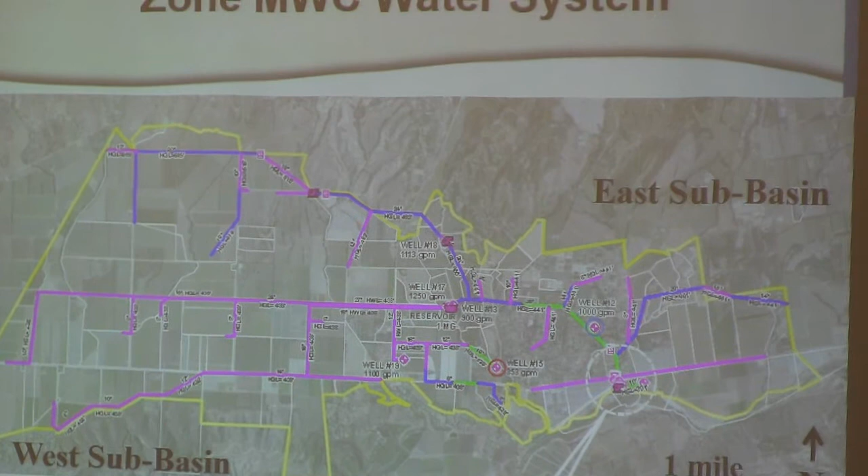There are the five wells in the West Las Posas that also feed that same reservoir. It's the properties on the east side of our system that get all their water from the arroyo wells, and these are the wells impacted by the high chlorides—chlorides at 200 milligrams per liter, TDS about 1,700.

In an average year, and this hasn't been average for the last couple of years, Zone plans to pump and deliver about 5,000 acre-feet. Half of that is produced in the east from those wells, and the other half from the west wells. In the last 8 years or so, we've been purchasing some blending water from Calleguas to help reduce the salinity to the farmers we are serving on the east side of our system.

Salinity in irrigation water is not good. It reduces fruit size, impacts overall production, burns leaves, and is devastating for some crops. It's hard on lemons and way worse on avocados. Exactly how each orchard farmer handles the salinity is an individual management choice.

It requires more irrigation to push the salts beyond the root zones, and it requires different fertilization techniques. Certainly all orchards count on a good rainy season to change the soils. Berries don't tolerate salts, and the row crops along the arroyo are bedded up and irrigated such that the water carries the salts past the root zones. So salinity in irrigation water is a problem for Zone's shareholders.